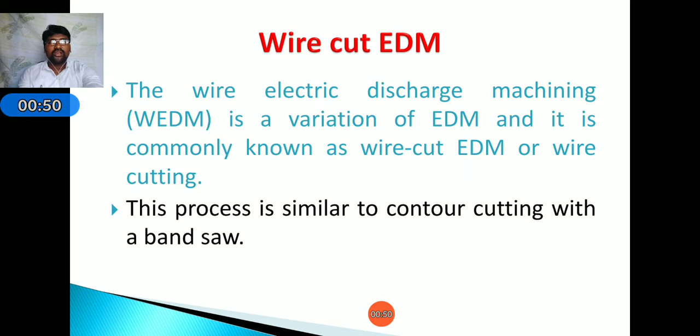Okay. Coming to wire cut EDM. The wire electric discharge machining process is a variation of EDM and it is commonly known as wire cut EDM or wire cutting. Next, this process is similar to contour cutting with a band saw as in conventional machining processes.

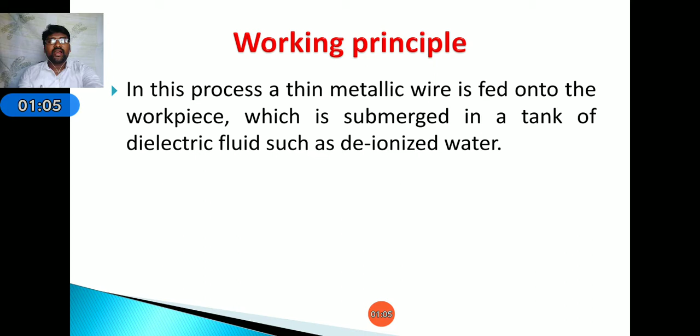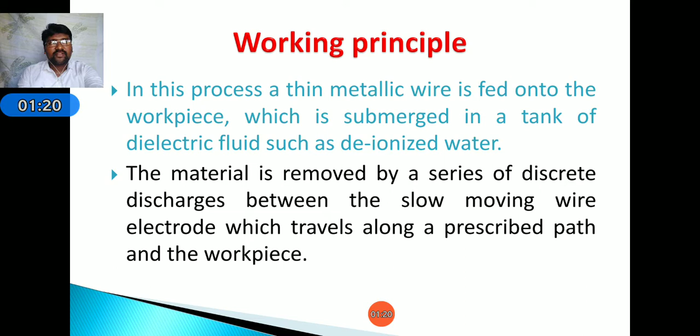Next, coming to the working principle. In this process, a thin metallic wire is fed onto the workpiece, which is submerged in a tank of dielectric fluid such as deionized water. Next, the material is removed by a series of discrete discharges between the slow moving wire electrode, which travels along a prescribed path, and the workpiece.

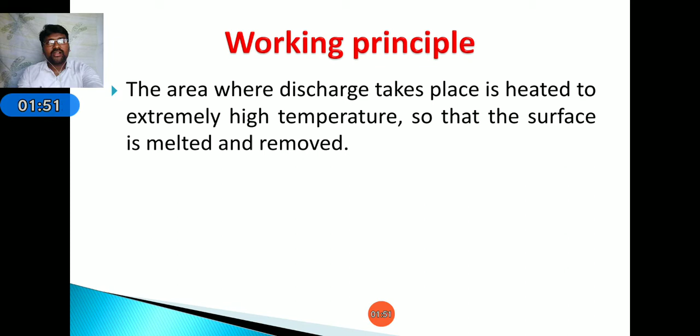Next, the area where discharge takes place is heated to extremely high temperature so that the surface is melted and removed, the same as in EDM. Due to the high voltage, the spark is generated between the wire electrode and the workpiece in the gap. Whenever the dielectric fluid is present, ionization will take place.

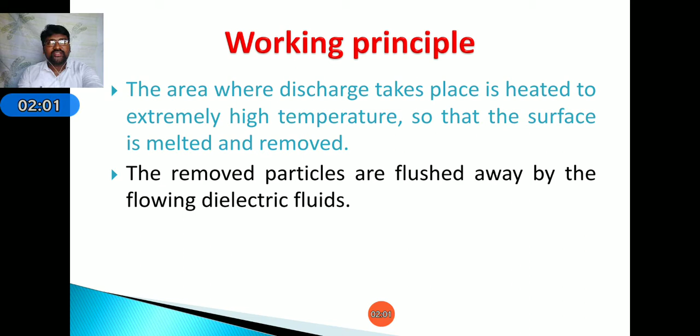Next, the removed particles are flushed away by the flowing dielectric fluid. It acts as a transfer medium for the removed particles. The wire is made of brass, copper or tungsten, about 0.25 mm in diameter.

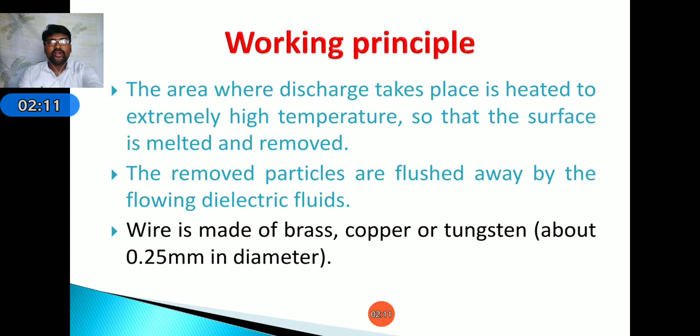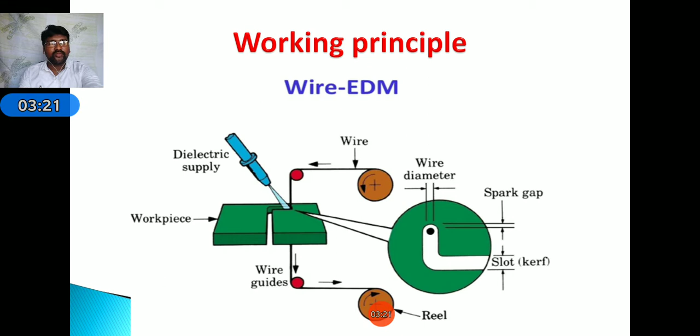It's computer numerical control. By this, it will move in the desired shape. Therefore, the cutting process is carried out by the principle of EDM, electrical discharge in the gap between the electrode and the workpiece. The spark will generate. Due to the spark, the localized area is heated. Due to this, the particles will be removed, that is, erosion will take place.

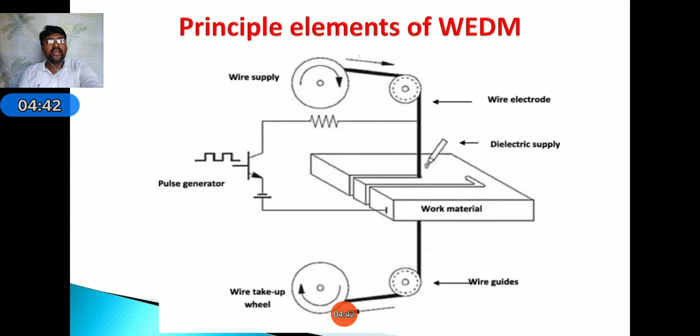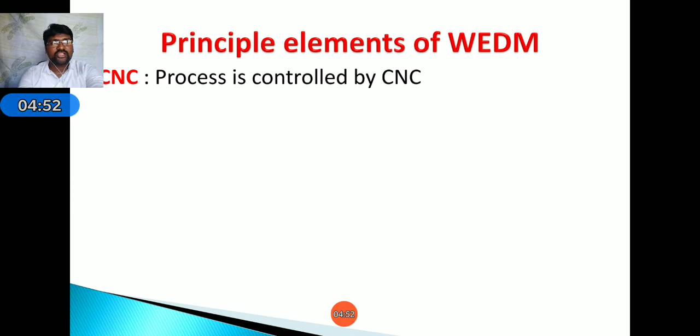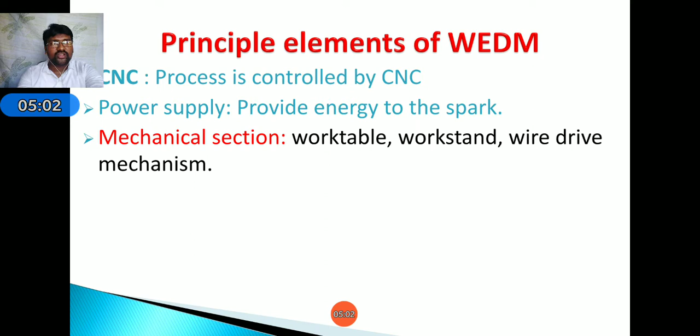Next, the principal elements used in wire electrical discharge machining. First, CNC, that is, the process is controlled by CNC. Next, the power supply provides energy to the spark. Next, the mechanical section, that is, the work table, work stand, and wire drive mechanism all come under the mechanical section. Next, tool materials like brass, tungsten, copper.

Next, workpiece materials like conductive materials and alloys. We can use only electrically conductive materials as a workpiece. Next, the wire diameter should be 0.25 mm, and the kerf width is greater than the wire diameter, that is 0.41 mm. Next, the dielectric system.

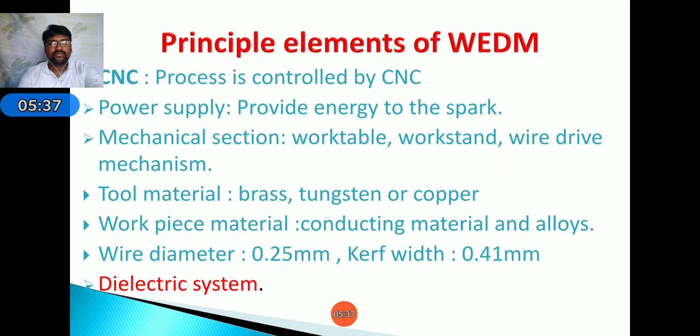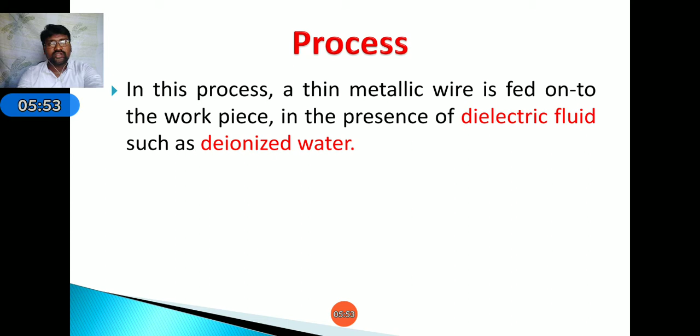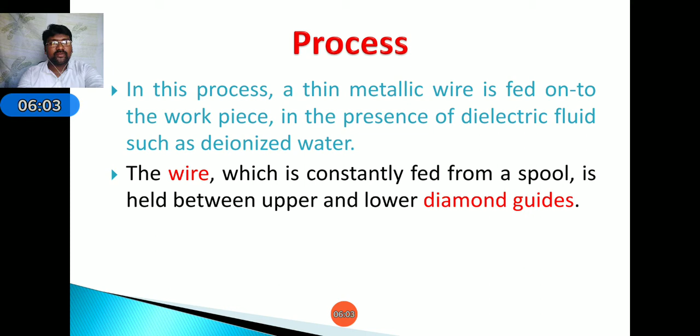Next, working process. In this process, a thin metallic wire is fed onto the workpiece in the presence of dielectric fluid such as deionized water. Next, the wire, which is constantly fed from a spool, is held between the upper and lower diamond guides. We are using diamond guides, which have less wear.

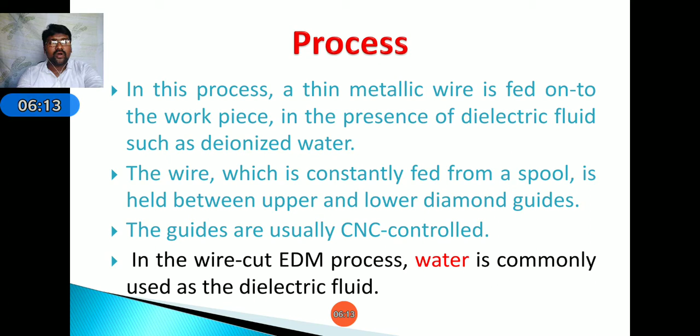Next, the guides are usually CNC controlled. Next, in the wire cut EDM process, water is commonly used as a dielectric fluid. Next, mechanism of metal removal. Here the metal removal takes place by melting and vaporization. The melting process is done by using thermal energy. Here the thermal energy is created by the spark developed due to the electrical energy, and vaporization of the eroded material. Like that, the material removal takes place.

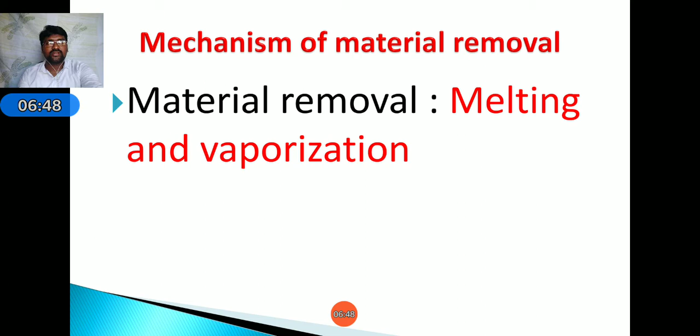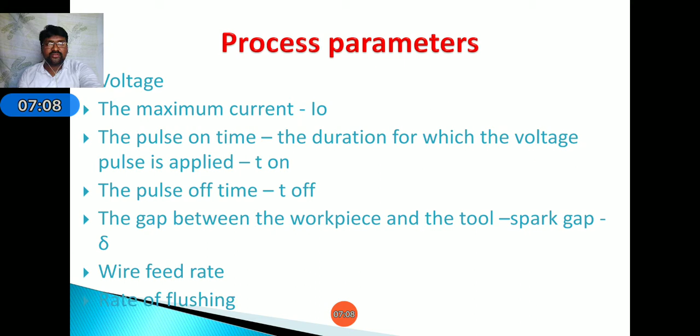Next, coming to process parameters, that is voltage, maximum current. Next, the pulse on time. Next, pulse off time. Next, the gap between the workpiece and tool. Next, wire feed rate. Next, rate of flushing. All these are process parameters. Next, coming to advantages, that is the machining accuracy is higher.

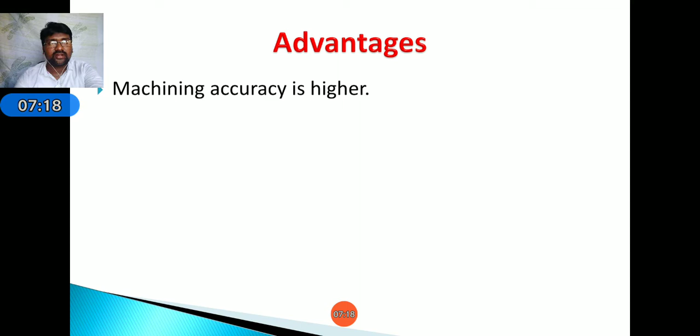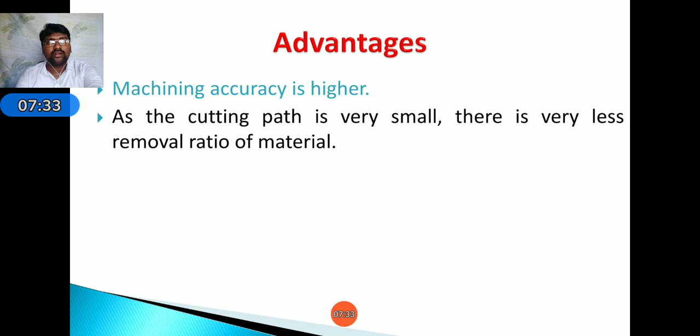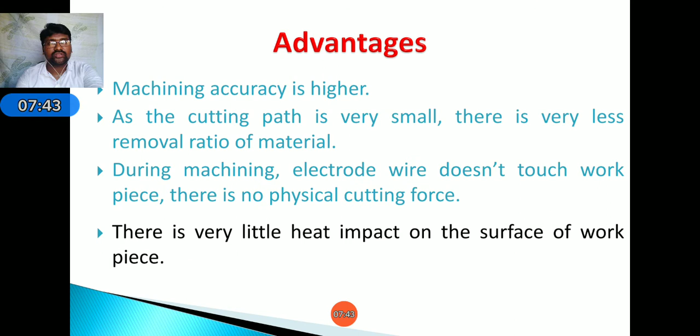Next, as the cutting path is very small, there is a very less removal ratio of material, that is, as the cutting path is very small, therefore it takes more time to cut the material. Next, during machining, the electrode wire does not touch the workpiece, that is, there is no physical cutting force. Next, there is very little heat impact on the surface of the workpiece. Next, it can machine small shaped holes, small gaps or jobs with complicated shapes.

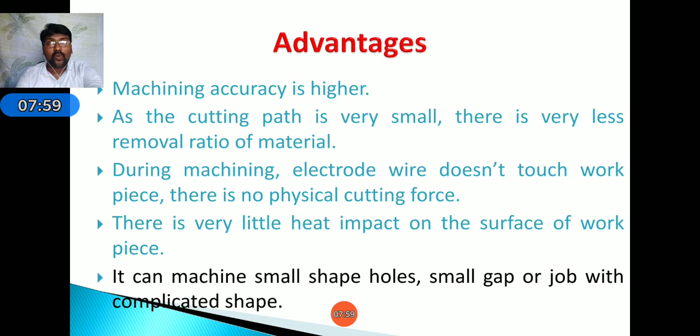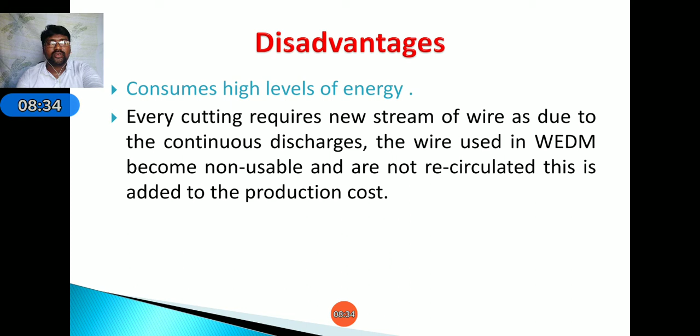Next, coming to disadvantages, it consumes a high level of energy. Next, every cutting requires a new stream of wire due to the continuous discharges. Next, the wire used in wire electric discharge machining is consumed and not recirculated. This adds to the production cost, because the wire used is consumed and not recirculated. Okay, it is the main disadvantage of this process.

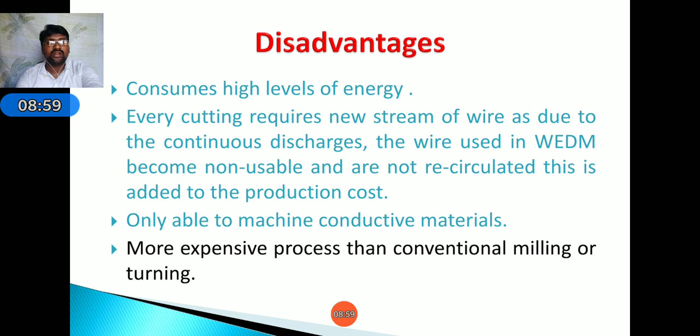Next, it is only able to machine conductive materials; it is another major disadvantage. By using this process we can only cut conductive materials. Next, it is a more expensive process than conventional milling or turning.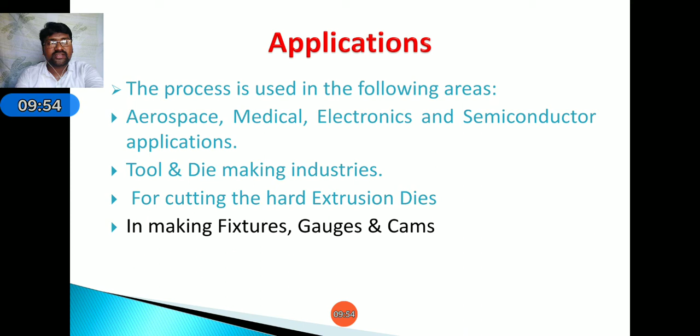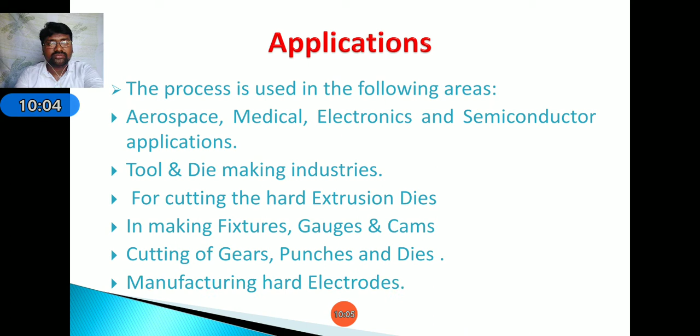Next, tool and die making industries. Next, for cutting hard extrusion dies. Next, making fixtures, gauges and cams. Next, cutting of gears, punches and dies. Next, manufacturing of hard electrodes. These are the applications of wire cut EDM.

In the next lecture we will discuss electro discharge grinding. It works on the same principle as electro discharge machining, but in that case we replace the tool with a grinding wheel. Okay, thank you.